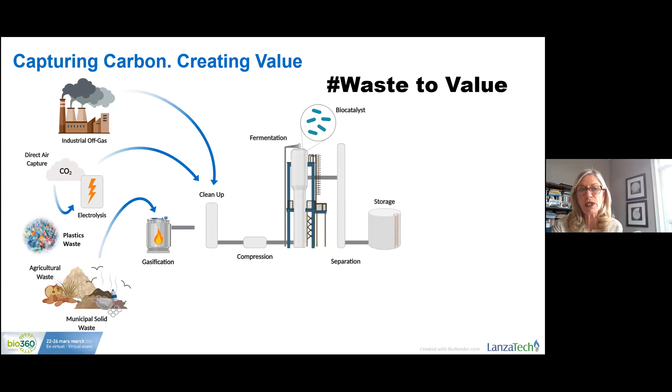And as we go forward, as we heard this morning, we continue to develop the feedstocks at the front end of the process, not only off gases from industry, starting with carbon monoxide, but also carbon dioxide going forward as green hydrogen becomes more available and at an economic price point, and the same thing for electrolyzers.

While we've been working on the front end with different feedstocks, we've been developing applications, starting out with the first application for LanzaTech's ethanol, which was transport fuels. As you can see on the top right-hand side there, really sustainable aviation fuels. The ethanol is converted in a proprietary process to jet fuel and diesel fuel, and is currently being used for road transport where it's blended with gasoline.

In the middle there, we have one byproduct, which is actually the spent biomass, which is very rich in protein, and in our plant in China is sold as animal feed. And on the bottom right-hand side there, we have developed with our ethanol platform a host of chemicals with downstream partners, including polyethylene, polyester, as well as direct applications for the ethanol.

As you can see on the top right there in the light green button with 2.0, we have a whole family of biocatalysts, a whole family of microorganisms. While the first one really focuses on ethanol, which we've developed downstream as a platform for chemicals and fuels, our second, third, and fourth microbes can actually produce chemicals directly, like acetone, isopropyl alcohol, and monoethylene glycol.

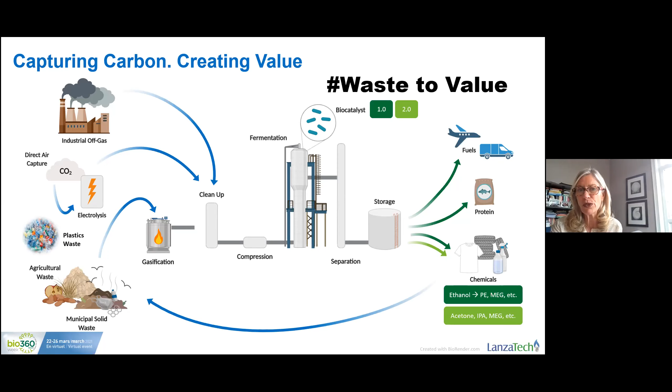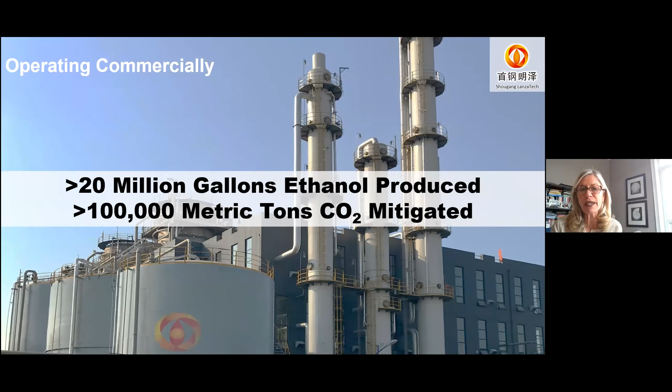This is an example of the plant in China. Of course, it sounds fairly conceptual to take carbon from gases and turn it into products, but this is not a concept. We've been operating at commercial scale in China since 2018 and have produced over 20 million gallons of ethanol in this plant to date, and mitigated over 100,000 tons of CO2.

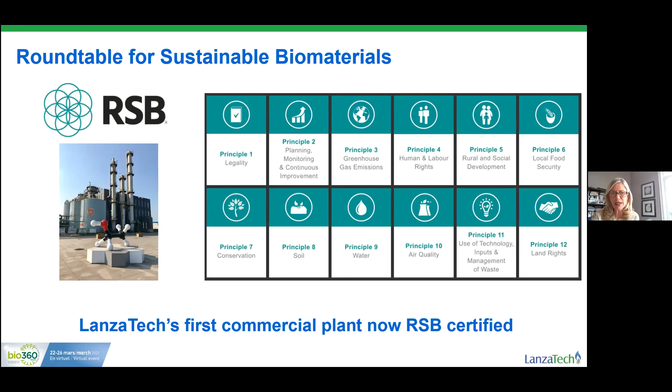We've also had the plant certified by the Roundtable for Sustainable Biomaterials. And as those of you who are familiar with this process will know, it's not just about greenhouse gas emissions, but lots of other key aspects of the process. We, of course, plan to continue to certify every aspect of our process with third-party experts.

Beyond the steel gases, as I showed in the first slide, we've been developing a range of other feedstocks. This is an example of the work that LanzaTech has done with Sekisui in Japan, working with them since 2014, so over 50,000 hours of operation, to demonstrate that our technology can actually convert the carbon from the syngas from unsorted municipal solid waste to produce ethanol.

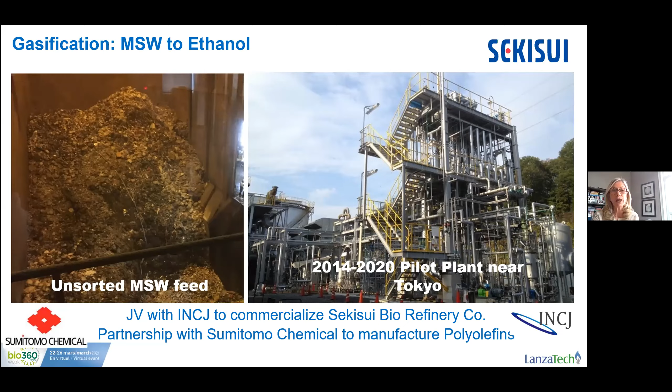So we're building a series of plants as we speak. I've talked about the ArcelorMittal plant, the steel off gases in Belgium, the steel plant in China. There is a second plant that will be complete in China this year from ferroalloy off gases, and a third plant in China next year.

Sekisui, I spoke about in Japan. We have two projects in India, one with refinery off gases with Indian Oil, and another one with another Indian oil company, MRPL, who are using agricultural waste and an Ankur gasifier to produce ethanol. We're also working in South Africa with Swayana on ferroalloy off gases, and in Europe with NextChem using plastics waste as a feedstock for the process.

So we continue to build out experience and operations with these different feedstocks.

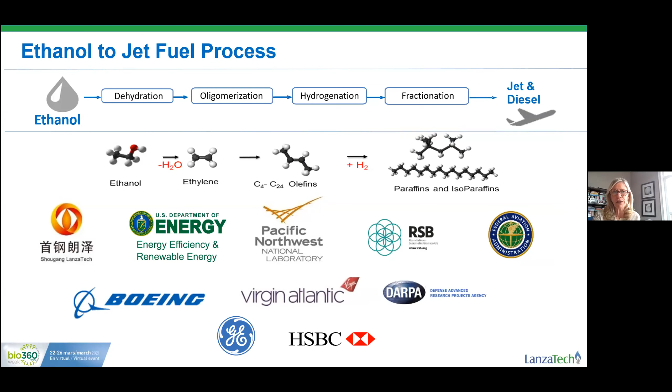This is just an example of the process that LanzaTech developed to take the ethanol produced from the process into jet and diesel fuel. As you can see, this process actually builds on ethanol and can use not only the carbon smart ethanol from the LanzaTech process, but any other source of sustainable ethanol, because the demand for sustainable aviation fuels is so high.

This is just a quick example of the timeline for commercial deployment of those aviation fuels. Last year in 2020, LanzaTech spun off a company called LanzaJet with investment from Suncor, Mitsui, All Nippon Airways, and most recently British Airways, to actually scale up and commercialize the sustainable aviation fuel, starting out at our Freedom Pines biorefinery in the US, and moving forward with a Horizon 2020 sponsored project called FLITE in Europe and other areas over time.

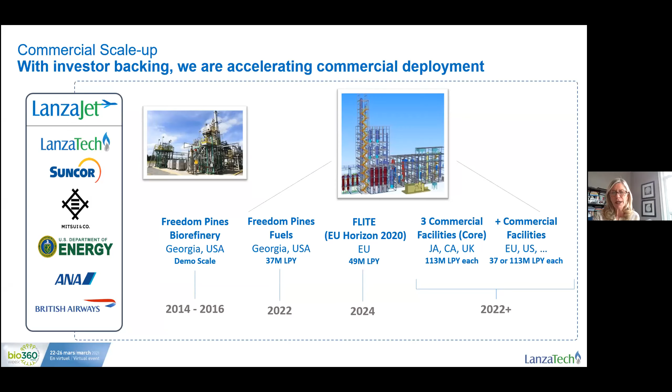We have many projects, as you can imagine. The ones we can talk about here are the ones that have been publicly announced.

About 3/4 of the way through last year, the first consumer goods product using LanzaTech's Carbon Smart ethanol was launched on the market. This is from the retail group Migros and their Mibelle Group product line of household cleaning products and detergents. These products are labeled as being based on recycled carbon dioxide, and consumer feedback has been very positive.

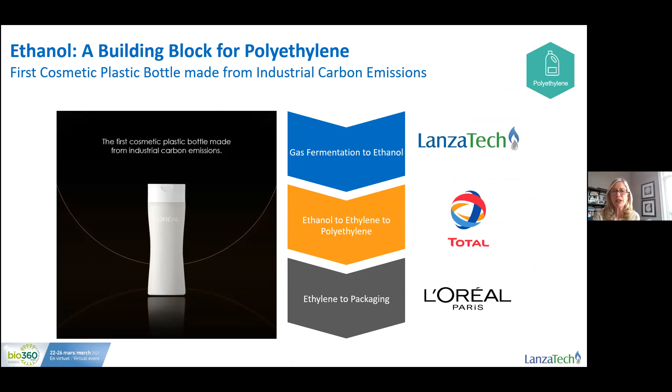I know Michael and the RCI initiative are working on carbon labeling as well, but this is a first positive indication. We've also worked downstream with partners like Total and L'Oréal, announcing the first cosmetic plastic bottle made from carbon emissions—actually steel gas emissions from China—where ethanol from LanzaTech was converted by Total to ethylene and polymerized to polyethylene for L'Oréal's packagers, to produce plastic bottles for their shampoo and hair care lines, helping them meet their carbon reduction targets.

Most recently, we announced a partnership with Coty, which has a broad range of fine fragrance and luxury perfume brands. They made the choice to replace all their ethanol in these fine fragrances with carbon smart ethanol from industrial emissions.

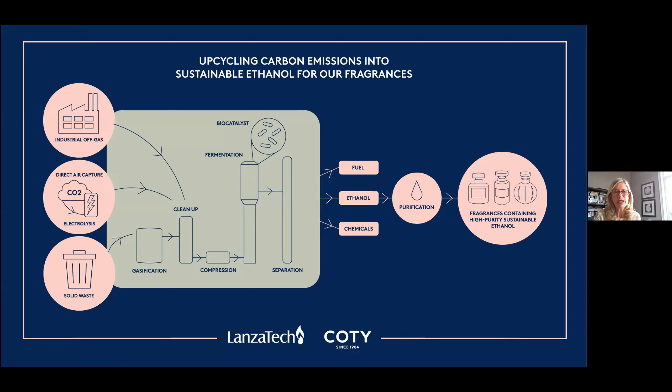One additional point: we've been working on taking that carbon smart ethanol and converting it, as shown on the left-hand side here, with different partners, to monoethylene glycol, which can be used by polyester producers to produce either packaging like bottles or textiles from carbon smart polyester.

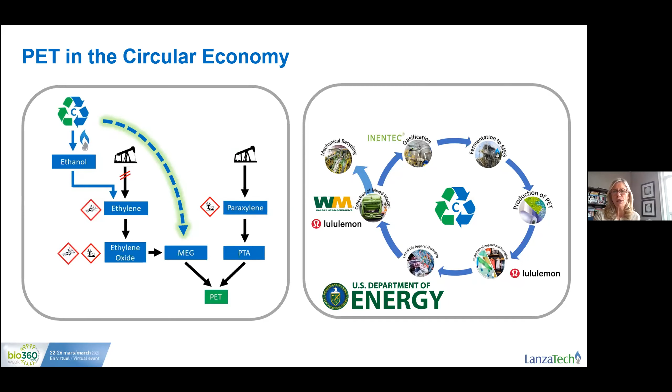On the right-hand side, we build out these applications beyond ethanol and downstream products. This is work funded by the Department of Energy in the US, where we're taking waste apparel and packaging from a brand called Lululemon, with the help of waste management, collecting that, gasifying the waste with INENTEC, and using the LanzaTech process to ferment the carbon from those gases to monoethylene glycol for the production of PET—really closing the loop and contributing to the circular economy.

Our dream from the start has been that consumers will actually be able to choose where the carbon in their products comes from. On the bottom there, as I said earlier, we've started with fuel—transport fuels, aviation fuels, ethanol directly for use in household products, as well as packaging, textiles, and plastics. On the top, we're really looking at second generation microorganisms from LanzaTech to directly produce chemicals without going through ethanol.

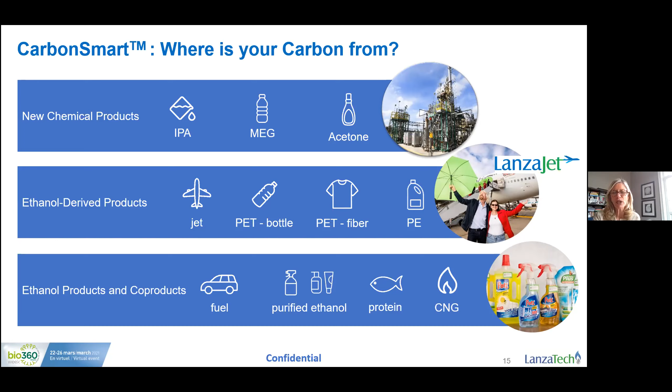So here we feel we can contribute to the circular economy. Obviously, in the case of fuels, there are emissions; however, those are reduced along with other emissions in that process by as much as 80% and more. On the left-hand side, however, when we lock the carbon into the products and those themselves are recycled, they can be reused and regenerated as part of the circular economy.

Thank you for your attention.

Thank you very much, Babette, for this very broad picture of what we can do with CO2 and waste. I think it's really clear that we can do mostly everything—a very encouraging message. I'm very much looking forward to the discussion with you at the end of this session, so don't hesitate, participants, to ask your questions in the chat. Thanks a lot, Babette, it was really great. Thank you, Celia.

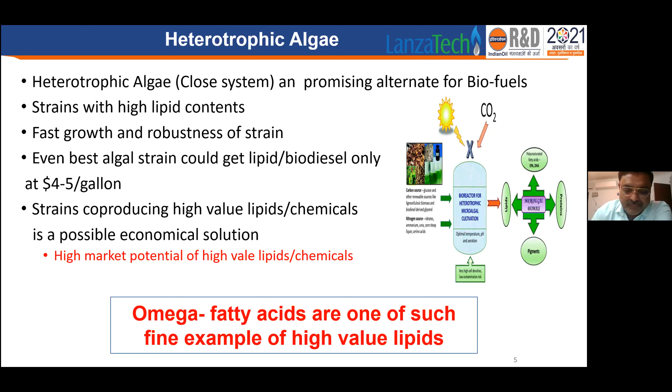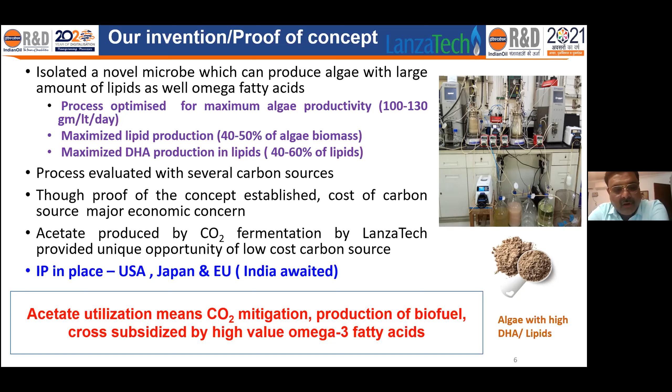There we came into contact with LanzaTech, where they have a carbon dioxide fermentation process that converts carbon dioxide into acetate, providing us a unique opportunity for a low-cost carbon source. Acetate utilization means carbon dioxide mitigation, and production of biofuel cross-subsidized by high-value omega-3 fatty acids.

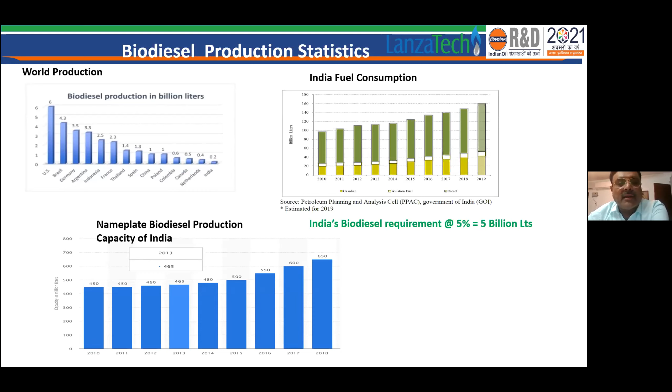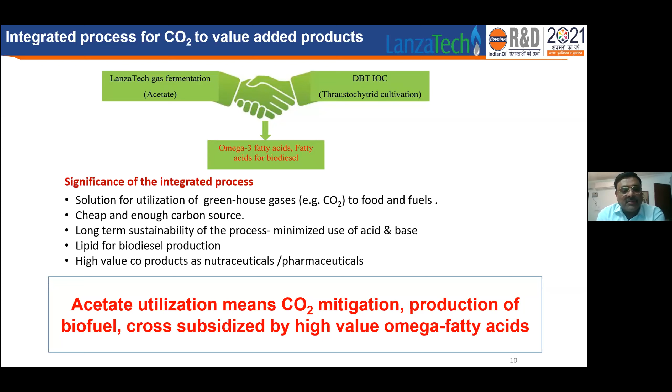As a first step, we got this bacterial culture from LanzaTech. It was transferred to IOC, and we have replicated the total gas fermentation process for the conversion from carbon dioxide to acetate in our lab, and established the necessary setup of the reactors. This process we have run continuously for 15 days to establish exact replication of what the LanzaTech process is.

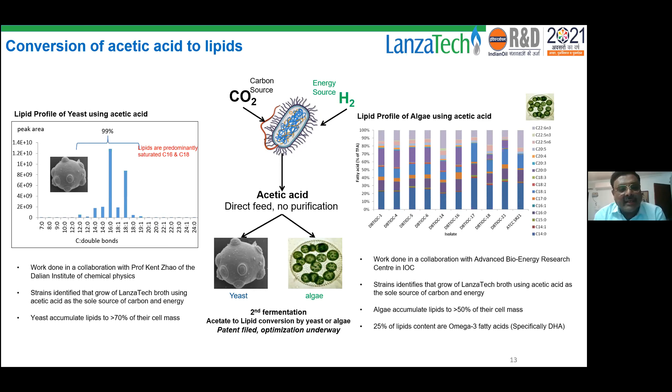In comparison, and as a challenge to integrate this process, the LanzaTech process is totally anaerobic. It cannot tolerate even traces of oxygen. It selectively produces acetic acid from carbon dioxide, using a proprietary anaerobe. The concentration of acetic acid is such that extraction becomes uneconomical. And another thing is that when the acetate is produced, the pH goes down, and a lot of alkali is needed to compensate for this pH.

The IOC process is totally aerobic; it needs oxygen. So the challenge is to link this aerobic to the anaerobic process. We have a microalgae which is fast growing, with a productivity of 100 gram per liter per day, and produces about 40 to 60% total oil, selectively producing omega acid, which also represents 40 to 60% of total oil. In our process, the pH goes up, meaning a lot of acid is needed. So in this integrated process, there is a very good opportunity for pH compensation, in which we greatly reduce the requirement of costly alkali and acid.

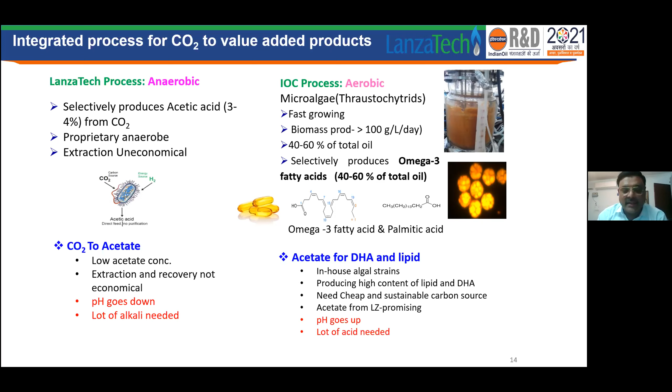In the integrated process scheme, first established in the lab, there is an anaerobic bioreactor suggested by LanzaTech, in which the acetic acid is produced. This acetic acid is separated from the bacterial culture, and the permeate goes into the aerobic lipid reactor. This also has a cell retention, where we remove all the water and recycle the chemicals back to the anaerobic bioreactor. The lipid reactor product is recovered as lipids and biomass, and in the aerobic lipid reactor there is carbon dioxide release, which can also be recycled back and used in the anaerobic fermenter. This lipid product accumulates with the algal cells, allowing for increased product titer through cell recycling.

This integrated process scheme was thoroughly established in lab-scale reactors, and based on that, we now have a pilot plant at the Indian Oil R&D Center, composed of three reactors: an anaerobic reactor, an algae growth reactor, and a third reactor in which we actually accumulate the lipid titer.

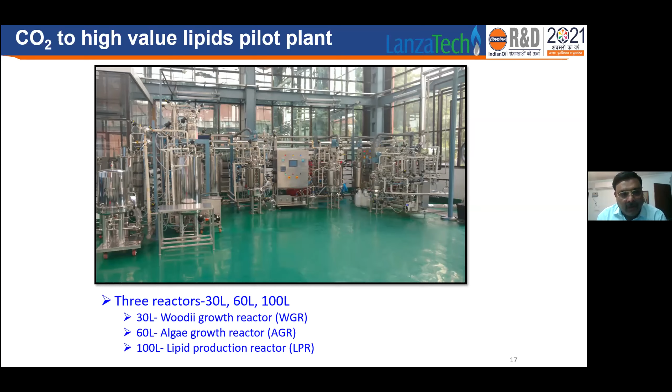This integrated process has been under optimization in the pilot plant, and based on the current status, we have found that if this pilot plant uses 10 kilogram per day of carbon dioxide, it will produce 5 kilogram per day of acetate, and this acetate gives us 3.3 kilogram per day of algae. From that, we can get 0.8 kilogram per day of biodiesel and 0.8 kilogram per day of omega acid, which is primarily DHA.

When we extrapolate it to the commercial plant capacity, if we prospect to be 100 thousand metric ton carbon dioxide per year sequestration, we can get 50 metric ton acetate per year and 33 metric ton algae per year. This will give us 8 metric ton per year DHA and 8 metric ton per year of biodiesel.

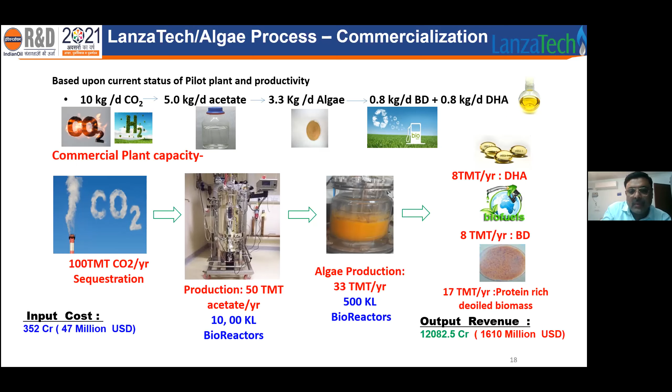In the next steps, we are further fine-tuning our pilot plant results, and then we will do techno-economic studies of the integrated process at normal pressure as well as high pressure. We will conduct life cycle analysis studies, and then we have a plan to go for a first demo plant, maybe by the end of next year.

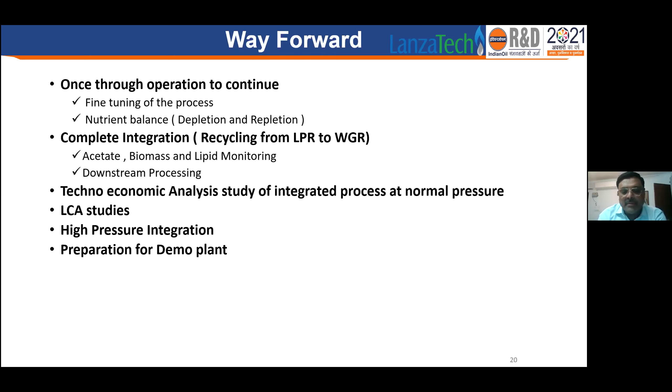There are several technology benefits which this integrated process provides. There is carbon recycling and commoditizing of carbon dioxide. There is production of fuel and food, so no issue of food versus fuel. Retention of biodiversity. It's an economically promising process due to production of valuable omega acids along with the lipids. The commercialization of the process provides energy access, which is competitive biodiesel and affordable nutrition. This is one of the integrated processes where there is no debate about food versus fuel.

These carbon dioxide streams that are likely to be available for commercial use are the monoethylene glycol plant, which is rich in CO2 gases, the 1G ethanol plant, which releases carbon dioxide from molasses-based distillery, the carbon dioxide from biomethanation plants, and the carbon dioxide from the steam methane reforming process. So this way it provides us with a great opportunity ahead.

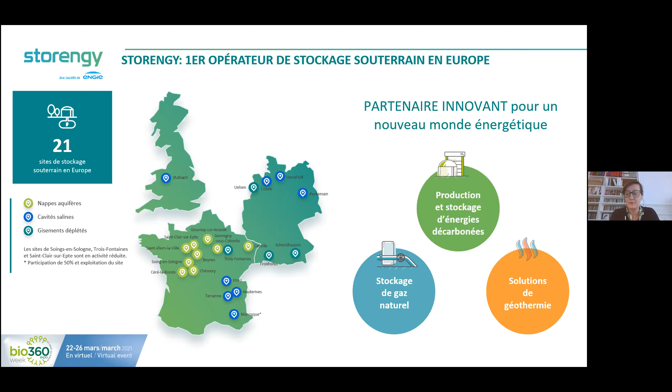So now I'm going to talk to you about the concept of power to gas. Why is this a virtuous project? Well, power to gas, what is it? It's a system, a unit that recovers CO2 from methanization. So it's a fairly traditional methanization unit. We recover the CO2 and do methanization with renewable hydrogen in order to produce synthesized methane, and the biomethane is then injected into the network.

And the synthesized methane is also injected. So methanation and methanization, we're talking about a virtuous combination, because it helps us improve the carbon yield of the biogas in terms of methane. It improves it from 55% to over 85%, because methanization produces biogas made up of CH4 to varying degrees, with the rest being CO2. We use the CO2 in the methanation units so it's used almost 100%, depending on the performance of the methanation. This makes it possible to produce a 100% renewable syngas.

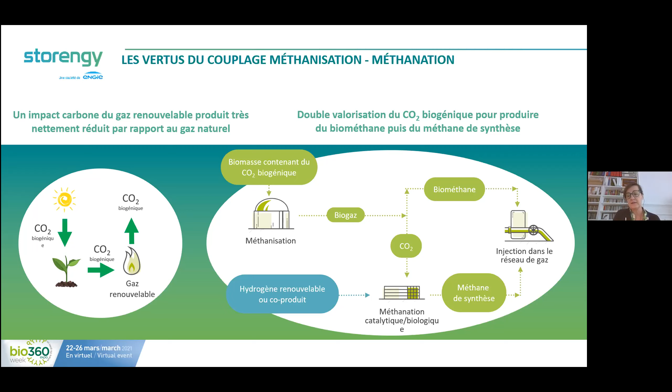So from an environmental point of view, it's 100% CO2 reuse, the CO2 that's absorbed by the biogas, by the biomass. And from an efficiency point of view, this means we provide different services and use a gas that's completely renewable. So this is very logical.

So Storengy is developing two projects. The first is called Méthycentre. It's the first project that was developed, a demonstrator, so we're talking about small volumes to begin with. It's combined with the methanization unit in Angé, so we've got power to gas coupled with methanization. It's close to Céré-la-Ronde in the center of the Val de Loire area, and as well as the methanization unit, which is small, as I've said.

We believe in the development of power to gas, but we also believe in the development of energy hubs, especially the coupling of power to gas with the possibility of green mobility based on hydrogen on the site itself, so there will be a distribution unit. I'm sorry, the sound has stopped.

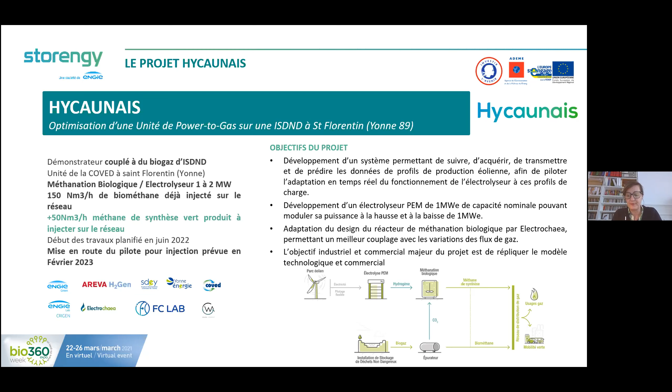So in terms of potential, well, we think that there's a lot of potential for power-to-gas systems. We need to have sources that are well developed in Europe, so it's important to have market data on methanization.

In Europe, we've got 660 methanization units, so that's quite a lot. And in France, we saw an increase - a 73% increase - in biomethane being injected onto the grid. We should be able to inject just as much syn methane. So we're looking at a big increase of injection of such gases into the network, but it represents less than 1% of all the methane that is on the network. So there's still an awful lot of development potential there.

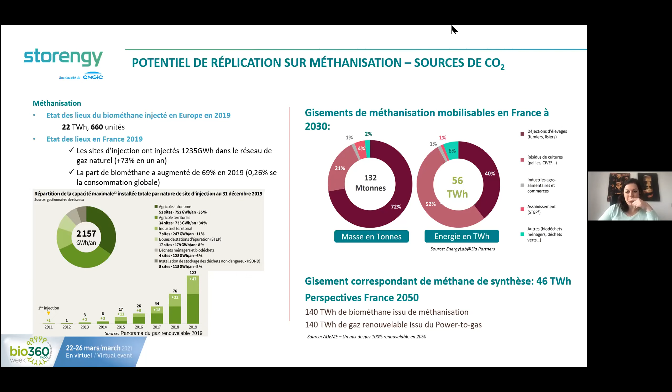On CO2 to methane, and it was a very good complement to what - sorry, I was muted, I'm not sure if you heard the first part. So again, thank you very much, Diane. I think it was a very - I'm sorry, I can't access the interpreting. May I ask you to unshare your screen, Diane, please?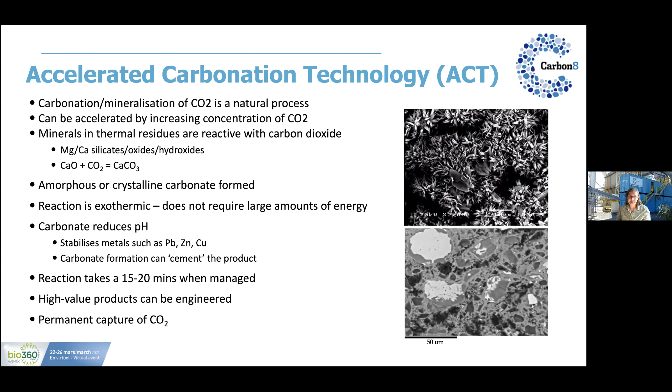The picture on the right illustrates our eureka moment and how we came into the accelerated carbonation world. My colleague Colin Hills was stabilizing some heavy metal contaminated waste forms with cement, and he noticed that the hydration of the cement was poisoned by the presence of the heavy metals. But if he exposed it to CO2, almost immediately he got a hardened product. In the bottom right here you can see bright cement grains with a rim of darker material where the carbon dioxide has sucked the calcium out of the cement grain and redeposited it as a series of needles into the void space within the residue. Those needles are illustrated in the top photomicrograph, where you can see the little polymorphs of calcium carbonate, and it's the interlocking of those needles that gives the material its strength.

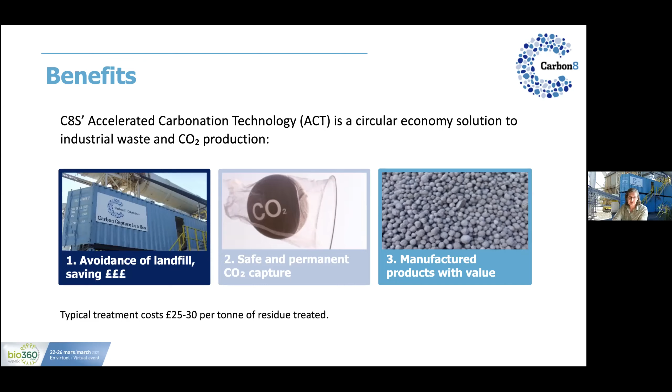So the benefits of the technology: it's very much a solution predicated on avoiding sending these industrial residues to landfill, and therefore saving on the cost of landfill. You get safe and permanent capture of the CO2, and you're manufacturing products that you can sell. Typical treatment costs are between 25 and 30 pounds per tonne of residue treated.

A lot of people talk about mineralization and say it's only a small scale CO2 capture potential. But there's a lot of work out there that illustrates that the total amount of CO2 that could be sequestered through mineralization is in excess of, well, the GCI, the Global CO2 Initiative, suggests over 3.5 gigatons through the formation of aggregates or use of CO2 in concrete. Our estimate of using our technology on the various waste streams is in excess of 1 billion tons per year of CO2 that could be sequestered. That's excluding the huge piles of legacy wastes that are available.

But it does include residues that have other applications, so we would have to dedicate all the cement waste or the biomass ashes to carbonation if we were going to achieve the figures you can see for each of the waste forms down at the bottom there in blue. Some of these symbols for the industries we're looking at are highlighted in blue, and these are the ones that Carbon8 Systems are concentrating on at the moment and developing solutions.

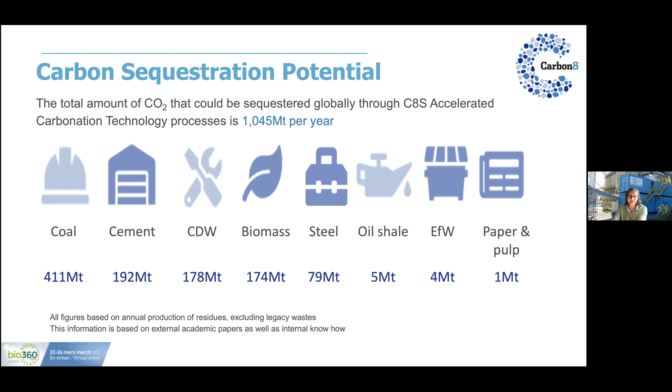But I want to talk, just because we're at a bio conference, a little bit about our work on biomass ash, which is still at the laboratory stage, but we think has some really interesting social and economic potentials. Most people, when they think of biomass ash, think about CHP plants where you're burning woody residues, a whole variety of woods, both waste and virgin wood, burnt for power and electricity. The carbon dioxide reactivity of those residues is very much related to the type of tree being burnt, the type of wood, and even down to which part of the wood is burnt, whether it's the bark or the core of the tree.

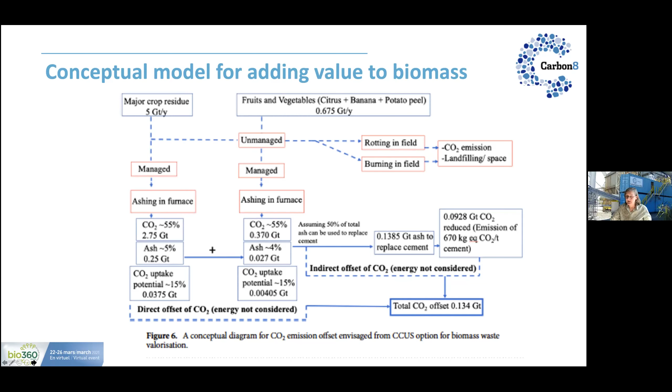The system we're using is very much what's called dry carbonation, so we use atmospheric temperatures and pressures to carbonate the materials. There are other companies using much higher water-to-solid ratios and getting precipitated calcium carbonate, but we use atmospheric temperatures and pressures because it makes the whole engineering of the process much easier to manage.

As I said, we developed the system from the modification of cement stabilization, treating hazardous wastes, and we first commercialized the technology in 2010 via license for the treatment of lime residues from energy-from-waste flue gas treatment.

Currently there are 3 plants in the UK treating those APCRs using pure CO2 delivered in a tanker, so it's waste CO2 collected from, for example, fertilizer factories.

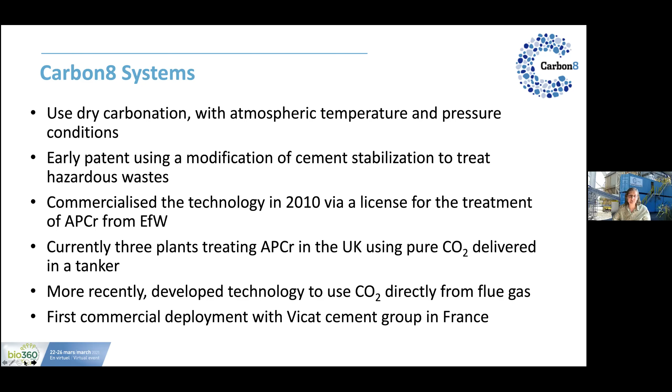But more recently, Carbon8 Systems has developed the technology to use the CO2 directly from a flue gas, and our first commercial deployment has been with the Vicat cement group in France.

This has been the result of a successive range of demonstrators. The first one in 2018 in Ontario, funded by the Ontario Solutions 2030 Challenge. You can see the capture of the CO2 here, flue gas from the cement works, about 10 to 12%, going into the system and coming out in a batch process, with the reduction in CO2 concentration showing the amount captured.

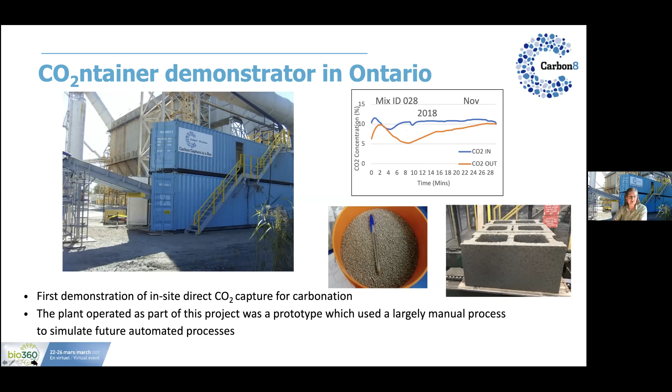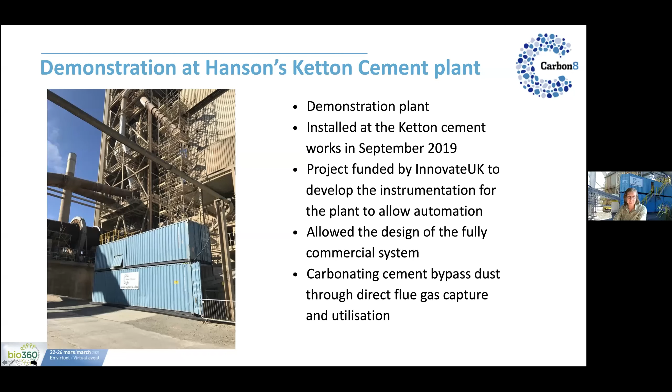The plant that operated in this situation was a prototype, usually rather manual. So we did a second demonstration in the UK at a Hanson cement plant in 2019, funded by Innovate UK government funding, which allowed us to automate the plant and then develop the full commercial plant that is now installed at the Vicat group.

This picture illustrates a nice sunny day at Vicat. What it doesn't illustrate is the direct CO2 capture, but this big steel pipe on the top right of the photograph is the flue stack from the cement works, and our container is positioned so we can simply plug into the flue gas, take a bypass of the gas, extract the CO2 from it, and then the remaining flue gas goes back into the flue stack.

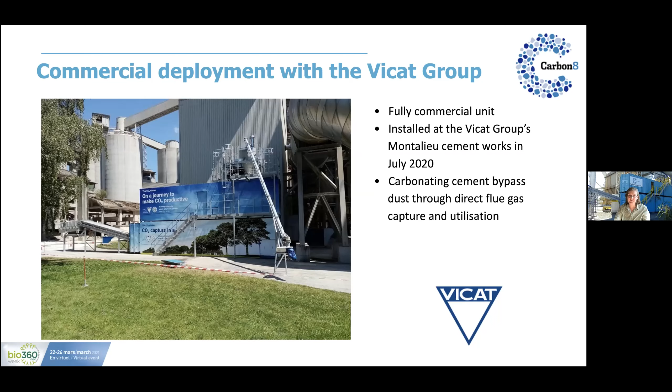So we can take a range of thermal residues, diverting them from landfill and manufacturing materials for the construction industry. Principally, we're manufacturing an aggregate that goes into concrete blocks. But in some residues, we can make a carbonated product that is useful for fertilizer, depending on the chemistry of the residues. It does have potential to provide supplementary cementitious materials from biomass residues to replace cement and produce building products with low or negative embodied carbon.

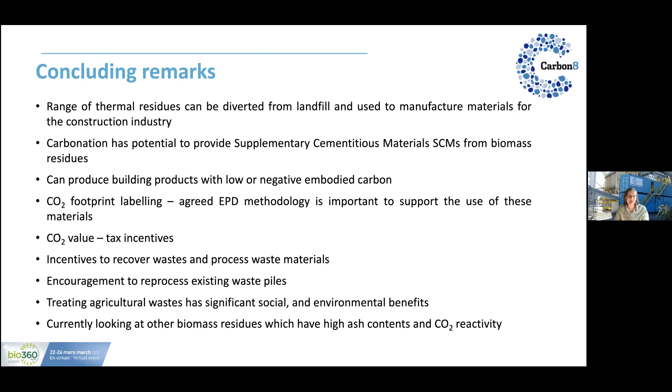The aggregate produced by the Vicat cement works has a carbon footprint in the order of minus 20 kilos per tonne. To progress this technology, as previous speakers have said in the last session, we need an agreed carbon footprint labelling to support the use of these low carbon products. We need tax incentives and the value for the CO2, incentives to recover the waste and process the waste materials, particularly reprocessing existing waste piles.

Treating agricultural waste, such as the ones I've outlined earlier, has significant social and environmental benefits because you're providing both energy for the communities, reusing their wastes, and also providing them with building materials, replacing some really horrid carbon-intensive processes such as brick making, which is very famous around Delhi, all the black smoke brickworks.

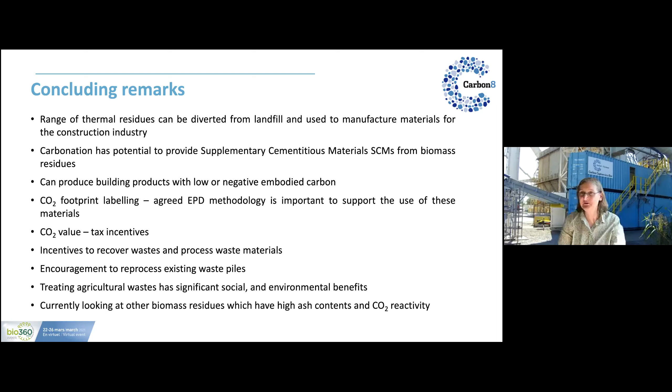This was a very interesting overview on what we can do with CO2 to create building materials. I already have some burning questions for you, but I will first start maybe with the first panelist, though I would like to ask all panelists to come back on stage if you can switch on your video and microphones.